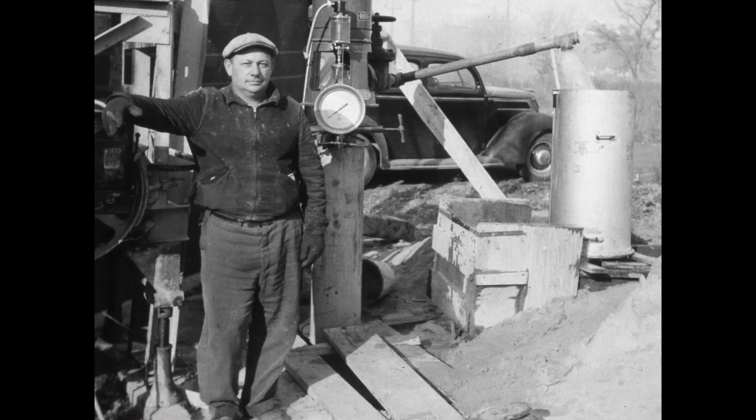Just a couple more pictures from our files. This is a pump test using an orifice bucket. We have a number of these. We still have one that we use today, and we have drillers borrow them once in a while from us.

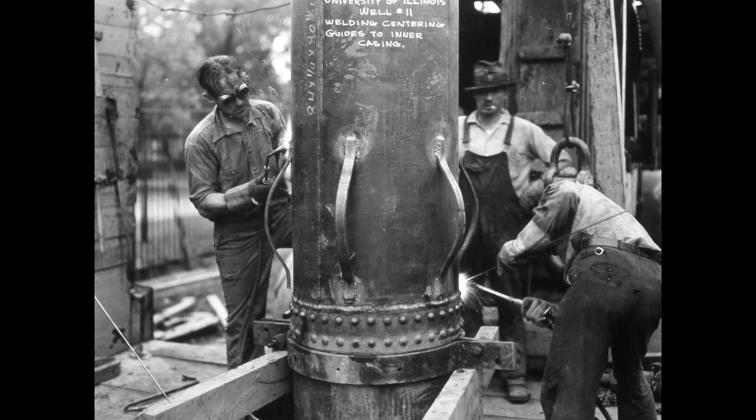And also just think about, if you're familiar with well drilling, this is a well that was put in on the U of I campus in 1926, I believe. And if you look at the work that went into not just the spacers, but riveting every 10-foot section of that pipe, it was quite a job. And so, today's modern drilling methods and the way we've come along has really changed the world, so to speak. But a lot went into it back in the day.

So a little bit about the water survey. I'm in the groundwater science section. We not only house the state's well logs, but we do data collection through that. We also have a water quality lab, but we do research and public service. And this is just a pump test at the city of Chillicothe that we were involved in, using an orifice tube there to pump that well and conduct an aquifer test.

But we also monitor stream flow. We have recorders. This is an old Stevens recorder. Most of our monitoring wells around the state now, our observation well network, we're using telemetry and pressure transducers, just because one, we get the data in real time, and it's allowed us to put our hydrographs online and show that information near real time. And we're working on trying to even improve those

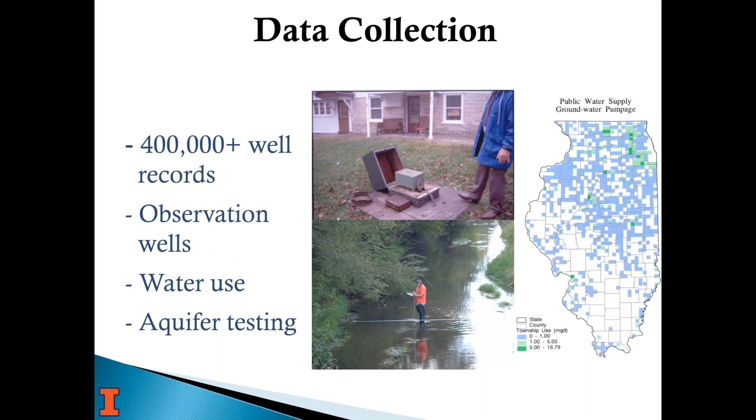capabilities. But also, if you're an Illinois operator, you're familiar with the Illinois Water Inventory Program. Our state Water Use Act requires every community water supply to send their water use in to us once a year. And so we have that data going back to 1978, which is really helpful whenever you're trying to plan and look at the growth of cities and things like that.

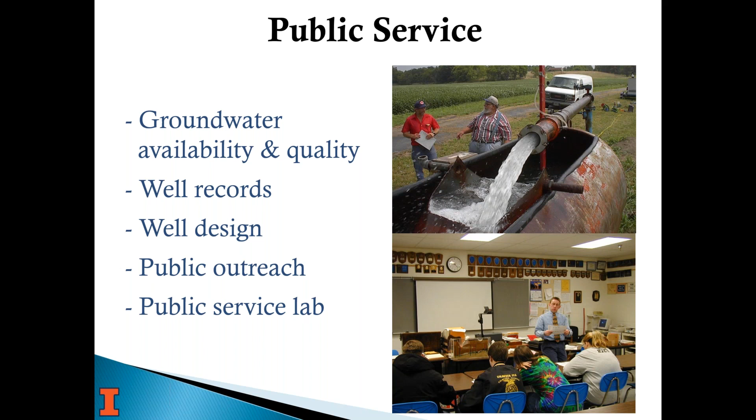As far as public service, again, we do pump tests, not as many as we used to, but we also house the well records, and we have well design capabilities, as well as a lot of public outreach and education programs. We run a program called the Private Well Class. It's nationwide. It's meant to help people with private wells understand how to take care of them and what risks they have and those sorts of things. Plus, our public service lab does water quality analysis, mostly for private well owners, but we have others as well, for inorganics and metals.

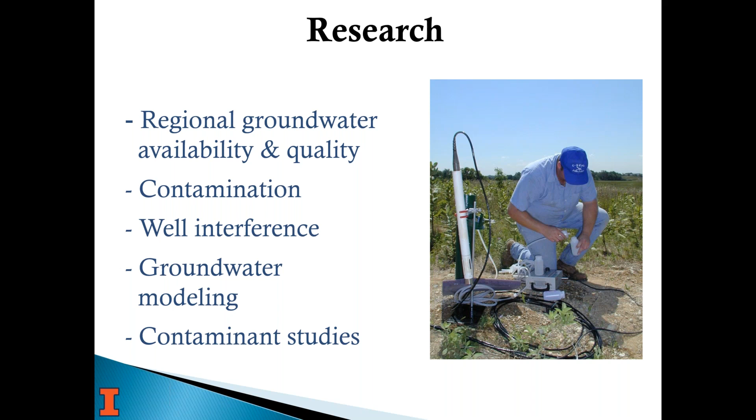And then on the research side, we do a lot of work looking at regional groundwater quality and availability, contamination problems, well interference. We've really led the way in groundwater modeling. We've developed some methods that are unique. We're working now with some of the cities in the Chicago region because of the problems with the deep bedrock aquifers there, as well as looking at things like PFOA and PFOS and lead and other kinds of contaminant studies, arsenic as well.

So we're going to go through a little geology lesson. What I've learned and what I assume for most water operators is you may have a well and a groundwater system, but it's just your source of water. You're not a geologist by trade, and there's just a lot of things that we all can learn from each other related to those things. So this is a porous system. When you look at a block of either rock or sand and gravel, it's either the fractures in the rock that hold the water or the space between the sand grains in the sand and gravel aquifer that hold the water.

So how porous that unit is, again, whether it's bedrock or whether it's sand and gravel, is called porosity, and it's one of the core measures of how good an aquifer might be. So in this case, it looks like sand grains, the water travels between them. That's why sand and gravel aquifers are so productive, because the grains are large, so there's a lot of water available, as much as 30% in a completely saturated aquifer in sand and gravel. And so it's why your well is able to produce so much if that's what you're in.

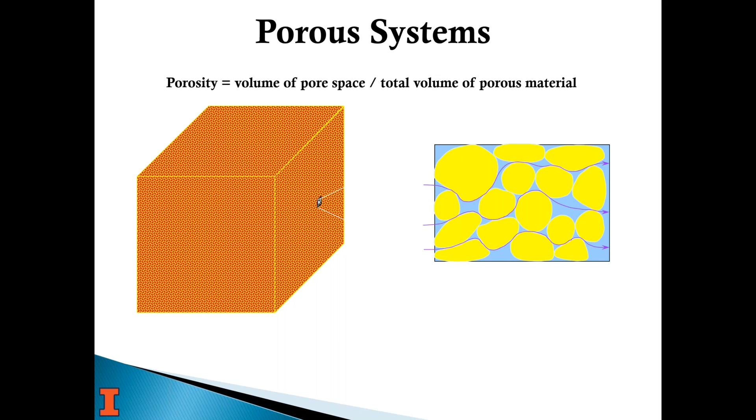And as far as bedrock, it's usually fractured flow. Sandstone, if you're in a sandstone aquifer, can have some secondary porosity in the rock itself, but for anything else, limestone, dolomite, even granite, those sorts of things, it's just the fractures that provide the water. So when you drill a well into a fractured system or into a bedrock system, it really depends on what fractures you hit. If you hit a bunch of fractures, you may have a lot of water available. If you miss all the fractures, you may have hardly any.

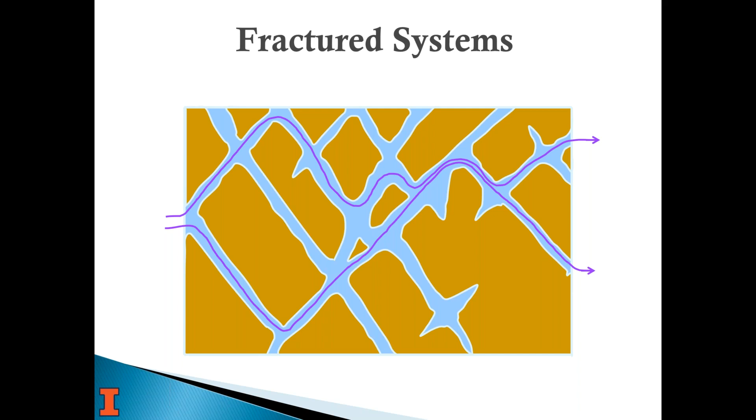And we see that in certain places in Illinois, especially one irrigated area. You can drill a well, and if you hit one of the large fractures, you're pumping 12 to 1,500 gallons a minute for your irrigation system. If you miss, you may have a 400-foot, 12-inch bedrock well that only produces 30 to 40 gallons a minute at most. And so they're really different systems when you look at sand and gravel versus bedrock and what you need to understand. So just another look at that.

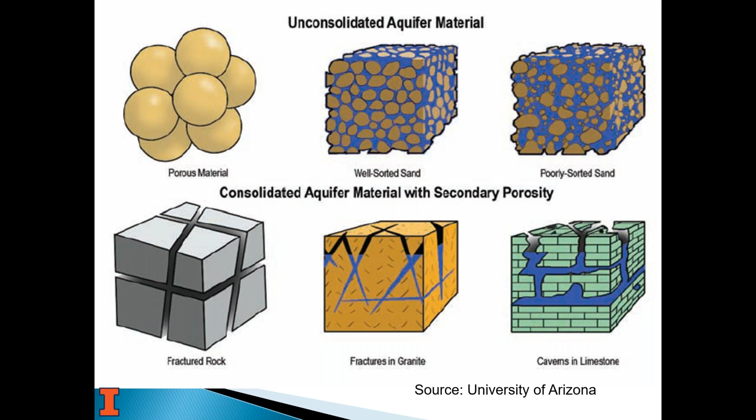And if you get in things like granite, like in the Rockies, the porosity there may be less than 1%, just because granite's very hard rock, the fractures are small, they're usually near the top, and if you don't hit very many of those, they're not that extensive and you're not going to have much water. And so it's just, again, good to know. It makes a difference, and I'll explain a little more about where your water's coming from, how close to the well you're actually getting your water from, and some of those things.

The other term that's really important and related to how much water a well can pump is the permeability of the aquifer that the well is finished in. When you're in a gravel versus a silt or a clay on the left here, it's highly permeable, sand and gravel, larger grains, and allows as much as 3,000 feet of movement a day. And permeability is a measure of the velocity, but the way water moves through the ground is also based on the difference in water level.

So when you're not pumping your well, it's at a static water level that's equal to the static level in the aquifer. But as soon as you turn your pump on, you're drawing down the water level in the well. That creates a cone of depression because water wants to be flat. So think about it like if I pour water on the end of a table and I lift up that end, water runs downhill. That's what it does whenever you turn on your pump as well. It runs towards your well because the pressure is lower there, and it's trying to fill that in to make the pressure equal again.

Almost like if you think about your bathtub, the water surface is at the same elevation. But whenever you turn on the drain, it starts lowering on the end where the drain is, and all the water flows to it because it's trying to be level. So permeability is just how fast it can get there. In a bathtub, there's no resistance because there's no grains in there. But if you put a bunch of clay or sand in there, you'd see a difference in how fast the water drains out.

Because when you get down to really small particles like silts and clays, even though they may have the same porosity, like the clay shown here may have a porosity of near 20 or 30%, the grains are so small that water can barely move through it. So on the low end, in a really tight clay, water will only move a foot every 10,000 years, which is why clays and silts, as well as on the right there, shale and rock that are cemented, are considered aquitards or aquicludes, meaning water doesn't go through them, instead of aquifers where water can be moving through that system. So on the right side, we have limestone and sandstone.

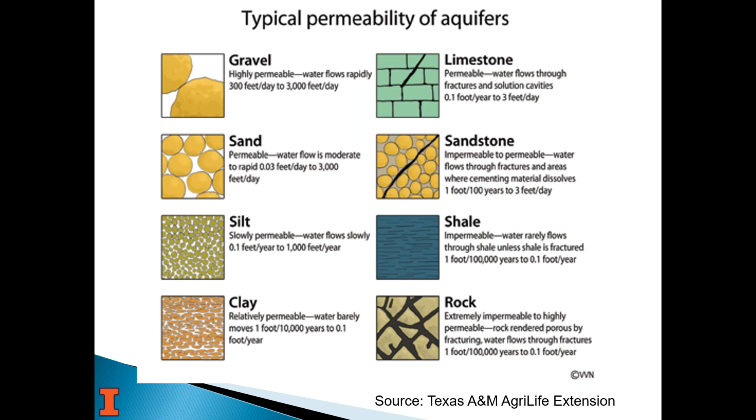Shale is basically cemented clay. It's really tight, bedrock formed clay. And so that's why it's 1 foot in 100,000 years on the low end, because if it's a really tight clay, water barely will move through it. So it acts as a barrier for water flow.

Okay, and these are just other examples of the way water moves through. These are like horse troughs full of that material, and you poured water uniformly across the top. This is kind of the wetting front, or how it moves through. And so you can see the sand and gravel, it kind of moves through all the grains in the sand and gravel. So it's kind of got an even front. A little bit of variability in the sand causes a little bit of differences.

But then on the lower left, crystalline bedrock, as I mentioned, the porosity can be less than 1%. The fractures aren't necessarily connected. And so you're really hoping that you're hitting a bunch of fractures whenever you drill into that, if that's what you have. And that's unfortunate. A lot of times in areas like that, that's why they have lakes or surface water systems, because there just isn't enough water available. There may not be any aquifer with potable water.

So then dolomite, it's formed in layers. And again, these are also simplifications. Rock does not lay flat in the ground. It's usually at some angle. And then every once in a while, there's some kind of geologic fracture or break where the units have separated, when the mountains were formed, or when there's been earthquakes. And so it's much more disjointed than this, but it's really meant to just show, like the one on the bottom, how water would move through.

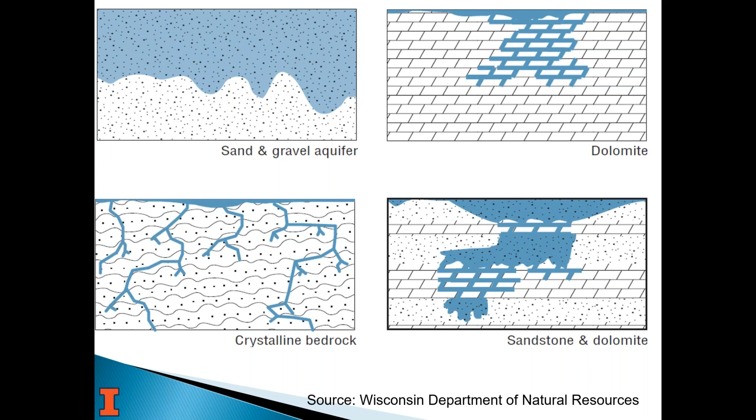And so it's not uniform, it's not even. All aquifers aren't created equal, and that's why you need to understand what you have in your area and where your water supply is. This is from the Iowa Department of Natural Resources and their manual, it's just a groundwater basics manual. This is what we see in Iowa, Illinois, glaciated areas.

There's glacial drift on top, and that may or may not have layers of sand. In this example, really, they're very small layers of sand where the glaciers have receded or advanced and then melted, except along the river valleys.

And, for instance, the Mississippi is now, say, half a mile wide in parts of Illinois. But the actual bottom ground where the Mississippi used to flow when the glaciers were melting might be 5 or 6 miles wide. And most of that bottom ground is full of sand. So you see a lot of communities, like here that shows 2 wells. One's in the sand and gravel at the top up there, and the middle one is down into the sandstone and limestone in the bedrock aquifer, because they're off that.

The other option a community has is putting a well in the sand and gravel and alluvial bottom, like along a large river system, and then piping it back to their community. And we certainly have a lot of that in Illinois as well, in areas where once you get off the bottom ground and get up in the uplands, there may be, like in this example, glacial drift that is all clay, so there's no aquifer that well penetrates. And so they went down into bedrock.

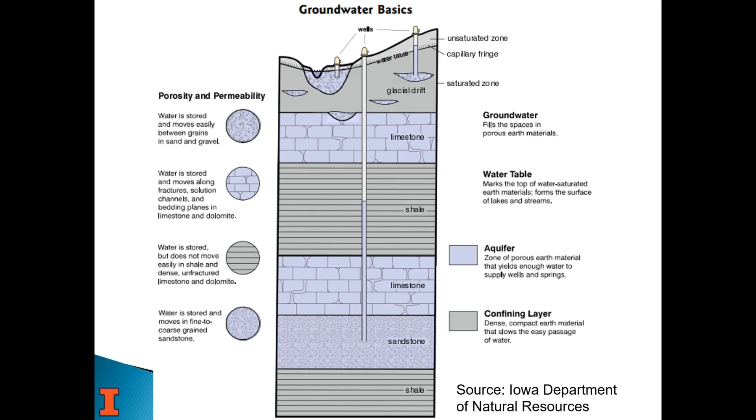As far as groundwater flow, the hydrologic cycle, most of what we see is about rainfall running off into streams and then eventually the ocean and evaporating back up and starting over. Well, there's a whole groundwater component that's much more complicated that also plays a part in that. The recharge area is shown on the upper left and right where water infiltrates into the ground, and then it can move in a shallow system, it might move within days to a seep, like it shows on this diagram, or a spring, or it can move straight down through the aquitard over time and eventually get to bedrock.

But all along here in all of this system above the aquitard, that's above the lower aquifer, it's a shallow system that eventually runs back to that stream. And that's because the water level in the stream is lower than in any of the aquifers. And you can see the water table shown in the dotted line on that. But all that water is flowing, eventually discharging to the stream. And so it becomes surface water again, and starts the whole process over again.

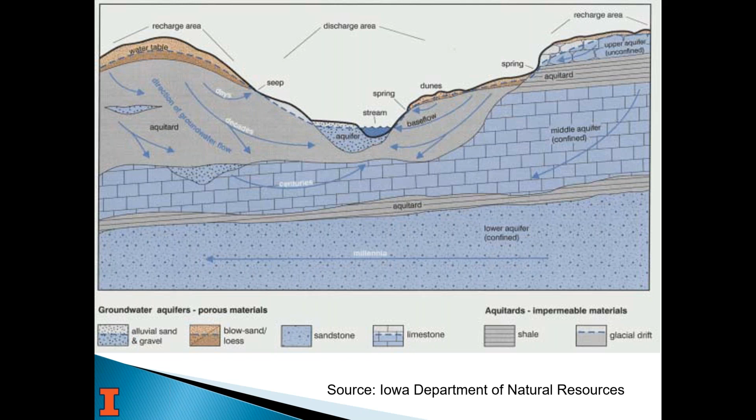But what's interesting here is an aquifer that's truly confined and deep enough may have a recharge area that's hundreds of miles away. And so even though there's a stream above it here in this example, the lower aquifer is flowing from right to left. And its discharge point, as I said, could be 100 miles away. And there is a very little bit of water moving through that aquitard and pushing down into that aquifer, but it's not a lot. Most of the recharge is probably coming from somewhere off to the right in that system, because the aquitard just doesn't allow that to occur.

And so there's really three types of geology that determine what kind of well you have. And I included dug and bored wells here mainly for non-community systems, because sometimes a campground or a small business may be in an area where there's no real aquifer. And so they may have a large diameter dug well, especially if it's very old, or bored, if it's more modern, but it's a large diameter well meant to store water. And so I included it here. Most community water supplies aren't going to have a dug or bored well. It just doesn't provide enough water in real time to supply a community and daily use.

The other types, though, are either sand and gravel aquifer wells or consolidated rock wells. And the reason we classify them that way, I know there's a lot of ways to put a well in. You can punch them in, there's a lot of other things you can do in types of drilling, but they're in one of these types of formations, and that really dictates what kind of supply you're going to have and what considerations you need to make.

So in some cases, like we showed in our examples, there may be choices. You may have 2 or 3 aquifers that you could decide to use. In a lot of cases around a community, there's a shallower sand or a shallower aquifer that a lot of private wells are on in that area, but it doesn't supply enough water for a large community. So the community well may be much deeper in a separate aquifer where they can pump more than a few hundred gallons a minute without having to worry about not having enough water.

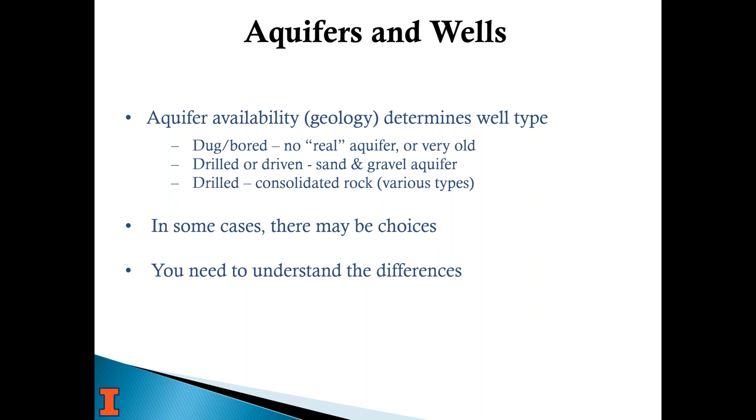So as far as dug wells, we see all kinds of them, all from the old dug well that's on the upper left here that has many problems. The reason it looks muddy on the lower right is because that's a cattle pasture, and those posts are all rubbed raw from cattle rubbing and grazing. This well's only 25 feet deep or so, and it's getting water from the water table.

That's a field. This year it looks like it's in set-aside ground, but it may not always be. And again, this is a pasture. Cows are defecating there and everything else. And so this is a really poor choice for a drinking water supply. And again, we wouldn't expect to see this for any regulated public water supply, non-community or community.

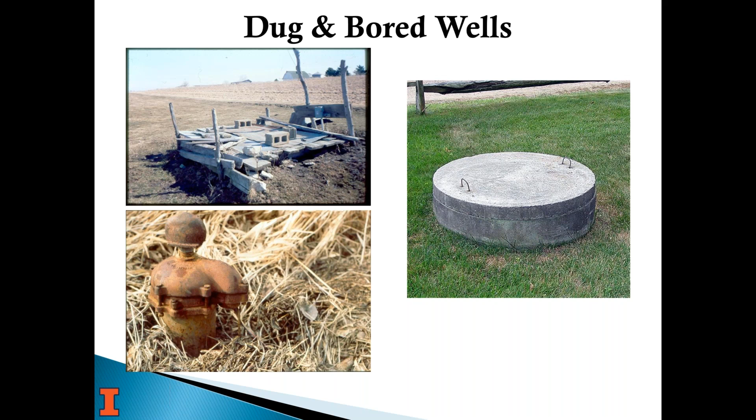The other 2 are also bored wells, one using concrete tile to the surface, and the lower left one with concrete tile that stops at 10 feet. But then they've covered the upper 10 feet with clay and concrete to make it less susceptible to surface contamination. And here's what those 2 look like.

The one on the left has a concrete tile going over the surface. If it's done properly, it's got concrete or clay in the annulus around that 36-inch pipe or concrete tile down to at least 10 feet, and that's the law in many states. But then below that, you're taking advantage of the annulus, you're putting gravel pack in there so that you've got more storage. And that's really why you have a large diameter well, is because you need the storage.

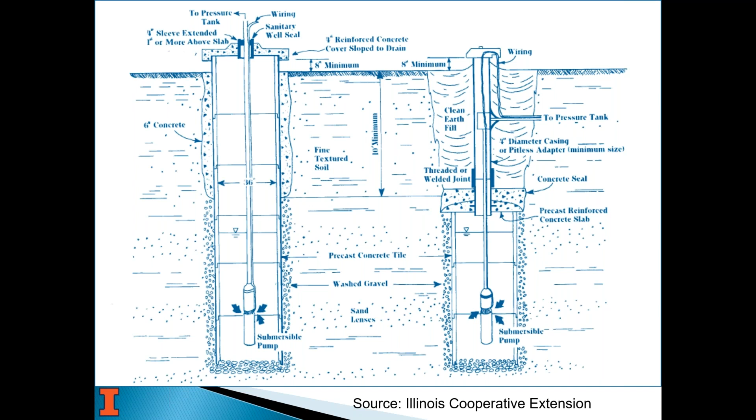Water seeps in slowly. There's not necessarily any sand. This shows a thin sand lens, but it may not be that extensive. And then the diagram on the right is the same type of well, except they put a concrete pad down below 10 feet so that they can fill that upper 10 feet with material that's going to help prevent surface infiltration.

Okay, so sand and gravel wells, if you're in a sand and gravel aquifer, your well has a screen. And what I want to point out here is if you have a 200-foot well that's in sand and gravel, you likely have, as a community water supply, maybe 10 to 20 feet of screen. And if your aquifer is not as good, it may be screened through the whole unit. But if you have a thick aquifer, I'm thinking about in Illinois the Mahomet, there's places where it's nearly 200 feet thick and it's fully saturated. You probably have a 10 to 20 foot screen for your well.

A 12-inch well, this may be pumping 200 or 300 gallons a minute, is a typical type of system. And the deal there is, if you have a 200-foot well, you only have water entering your well in that lower 20 feet where the screen is. The rest of that casing is either PVC or steel, and it's solid. And so no water can come in your well except at the screen.

And the way screens are sized is based on the sand and gravel that you have. The driller will take samples as he's drilling through the unit and then size the screen accordingly, along with a gravel pack around it that'll prevent sand from pumping through. Sometimes some fines will pump through. But again, and Dick's going to talk about this later about developing wells, probably a critical piece there to make sure that you've got everything in place and you've sized it right and all those things.

This is just an example of a well in Illinois showing the log. If you don't have your log or haven't looked at the log for your well, you should get it from your state. Hopefully they have it. It's not always available. We were doing a study 20 years ago or so, working with a number of rural communities in one county, and they had had a fire a long time ago, and their records were all lost, and so they had no records on the depth of their well or any of the information about how it was constructed.

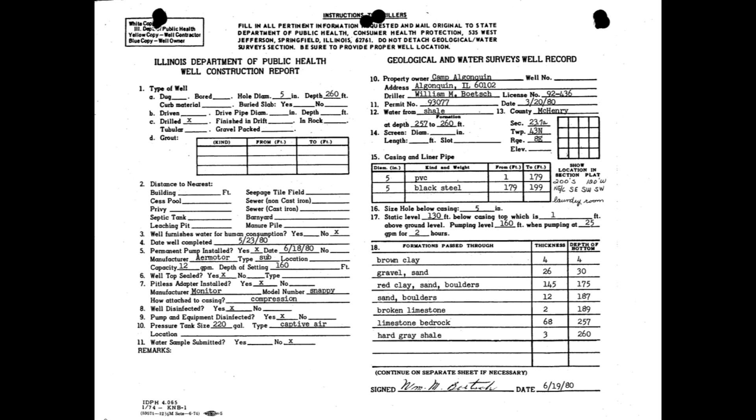Okay, so other things you should know, and I'm using Illinois as an example. I've worked in Illinois aquifers for 30 years. Your state will have maps of where your major sand and gravel aquifers are, where your bedrock aquifers are, water quality, a lot of different tools if you know who the right folks to ask are. Your primacy agency that you have to deal with for compliance should be able to tell you who those folks are. It may even be them. And so it's very different in every state. Your USGS, State Geological Survey, DNR, DEQ, there's a lot of different names they go by depending on what their roles are and how the state set up their drinking water programs.

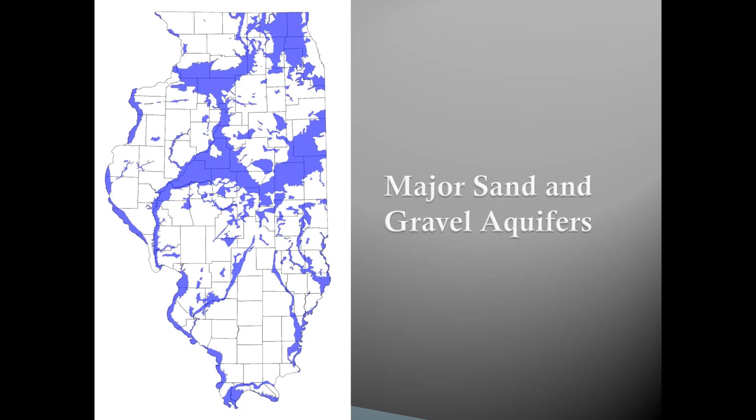But a lot of information is available through, like for us, through the water survey, we typically do regional assessments of aquifers. So this is in northwestern Illinois, where the ancient Mississippi used to run. Before Illinois was glaciated, the Mississippi actually turned and came through the center of the state. It didn't flow where it does now with the border with Iowa. But then glaciers came and turned the flow of the Mississippi to where it is today.

But those ancestral valleys are all full of sand, a lot of sand in some cases. And that's what the Mahomet is, I mentioned earlier. It's a bedrock valley where a river used to flow, the Mahomet-Teays. And in places it's 15 miles wide and 200 feet thick of sand alone.

And so that information is useful just to understand where water might be available. Maybe you don't realize your bedrock water has issues and you're treating and it's going to get more expensive. There may be one of these valleys close to you. Just talk to your resources folks is the message.

Because then when you look at this, it's the same map, but this is the thickness, elevation of the top of the aquifer that fills up that valley. It's all buried. But it shows you where there's a lot of water available. The glaciers do funny things. Some of them are thicker than others. Sometimes a second glacier will come along and scrape off a lot of that material. It's just much more complicated than most folks realize.

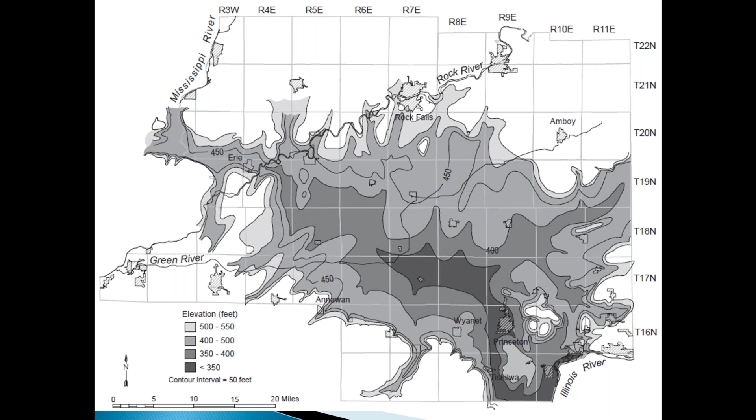And that's why if you reach out to some of these groups like your State Geological Survey, they can explain all that to you and provide you with a lot better idea of what you're looking at for water supply and where it comes from, where it's recharged, all that sort of stuff.

And then in cross section, this is what that looks like. So the deep aquifer here, the ancient Mississippi, is the Sankoty Aquifer, and that's on the bottom above the bedrock. Then there's this glacial till with a big hill, which is actually a moraine where a glacier stopped and deposited all of its material that ground up. And that's why you have this large elevation jump, and it's mostly clay with some thin sands in the middle of it.

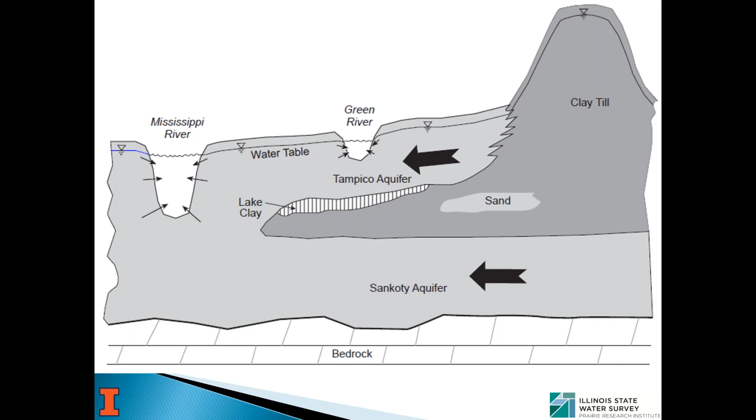But then the Tampico Aquifer shown here is actually part of the Mississippi after it moved to its new location where it is today. That's all the bottomland for the Mississippi, and the Green River is there now, but a lot of that is sand. And that's why if you're close to a large river system, a lot of times you'll have alluvial sands, which are deposited by a river, available to you. It can be much more complicated.

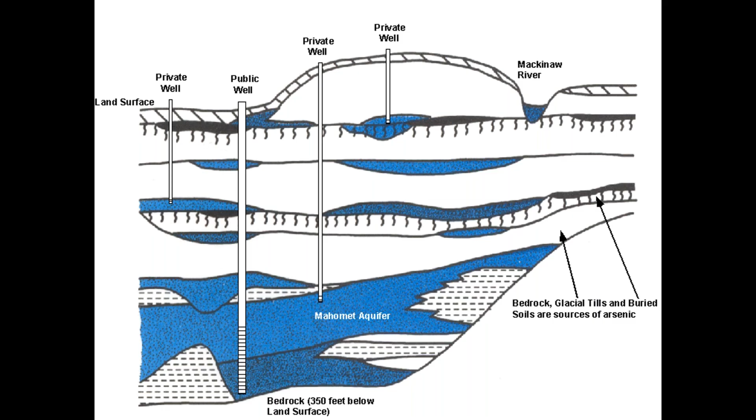So same thing for bedrock. In Illinois, we have a shallow bedrock system that doesn't exist everywhere.

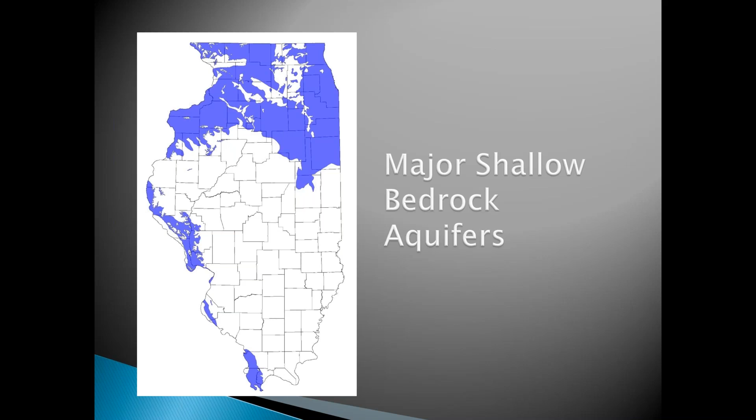But this is a dolomite mostly, I think. Yeah, it is. That communities can use for water supply. And then we also have a very deep bedrock system.

And I want to point out here, the blue is where we consider it an aquifer, but that deep bedrock aquifer actually exists everywhere. So that nice smooth line in the middle is because further in southern Illinois, our deep bedrock is saline. It's saltwater, and it's from an ancient sea that was here, and so it's not potable.

That line is actually moving because in the Chicago area especially, they're pumping the deep aquifer for water supply, and it's moving very slowly, but we're seeing the TDS increasing as you move forward. And recently, a community that's very near this line decided to put in a deep well to help supplement their lake water.

And honestly, it was a crapshoot whether it was going to be too high or not, if they're going to be able to treat it, because over time, depending on what happens with pumpage further north, by lowering the water levels further north, it's making water migrate to the north. And over a long period of time, if that continues, a lot of this aquifer will be unusable or will require basically treating it like it's seawater.

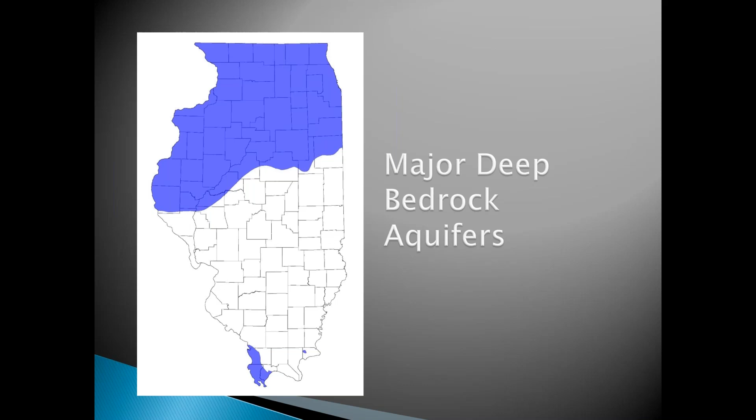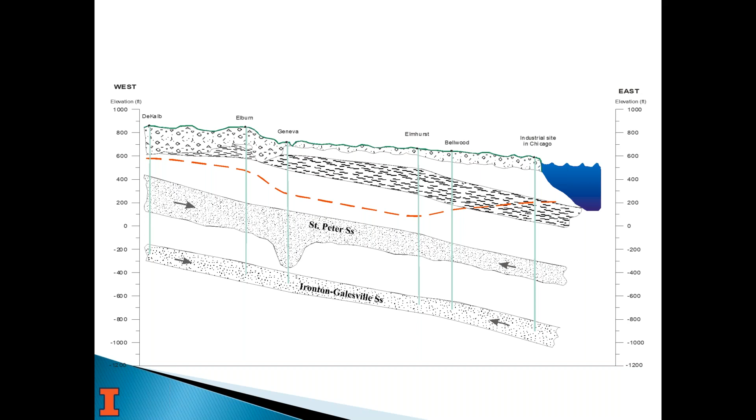If I took a juice box and I put a straw in it and I squeeze it, what happens? Water comes out, or your juice comes out. And it's the same thing here. It's the pressure on the system that forces water levels up in a well.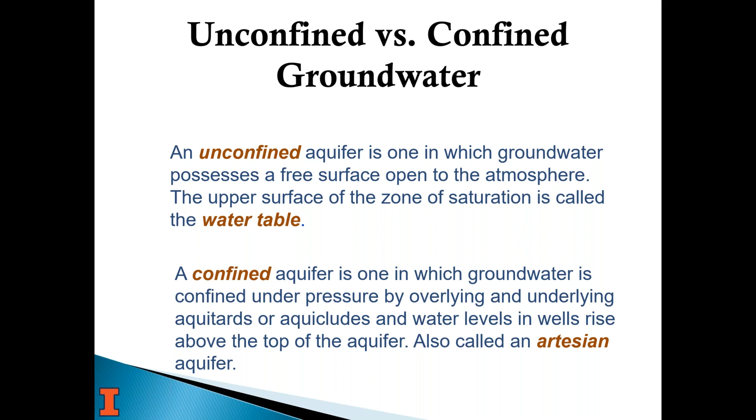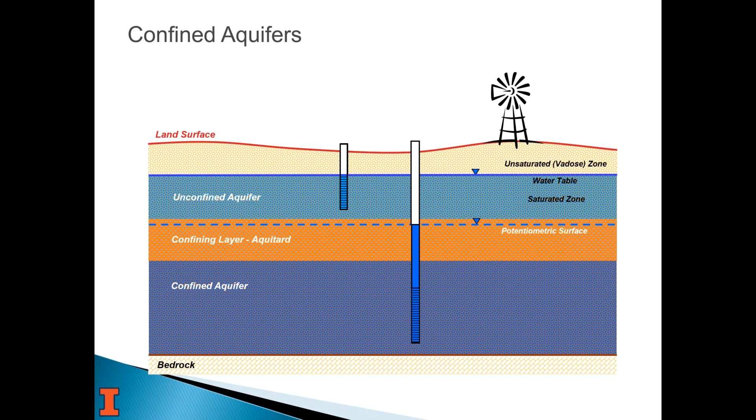A confined aquifer is called an artesian aquifer, which I already described, I think. So in an unconfined aquifer, the water level is at the water table. If you have an aquitard in between, you can have two different water levels because the aquitard prevents flow. And so the head in the deeper aquifer here is dependent on the pressure from both sides. This is an idealized example. What you've got here is your water table at a higher level than your confined aquifer, so water is moving down through the aquitard slowly to help recharge it because it's at a lower head. So there is water movement here; they're not at the same level.

Okay, so in a confined aquifer, you can see the water table is the blue dashed line here, but the water level in the confined aquifer is below that. So as I mentioned, that means that water is flowing down through the aquitard into the deeper aquifer. And then you can have that the other way. You know, if there's pressure from either side pushing water into the deeper aquifer at a higher pressure elevation, piezometric head, you can have a higher water level in the aquifer below the water table.

And in this case, what that would mean is water is slowly going through the aquitard on the top of the deep aquifer. It's moving upward into the water table and recharging the water table. And if it's flowing, you have a flowing artesian well. But in either case, whether it's flowing or not, it's still considered artesian.

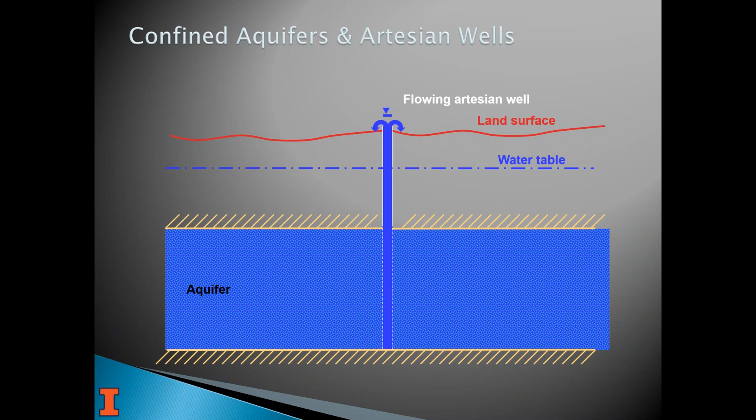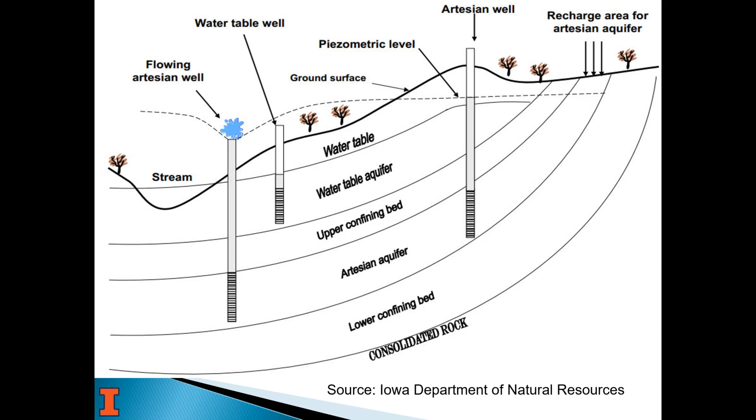And so just to show that again, on this example, to go back through it, you can see what an artesian well is. It means the water level's under pressure. So there's water from, in this case, on the right, increasing the pressure on the artesian aquifer, causing the water levels in the wells to go up.

As far as pumping, and again, this is idealized. So if all of this was uniform sand, what you'd see when you pump your well is drawdown most at the well, and then water's flowing from all around trying to fill it in. So when you look at the upper part of this diagram, that's a cross section. That's what it would look like if you could see through it from the side. And the diagram on the bottom is what the equal elevation lines look like.

So you've got a cone of depression that's at 400 feet at the well, and that's elevation, mean sea level. And out where the edge is, where it's not influencing anymore, it's at 460. And so these circles correspond, if you could draw a line straight up to where it's at on that cone of depression on the diagram that's from the side, the cross section. And so that's what happens. So it's radial flow, it's coming in from everywhere because it's equal pressure, and it's trying to fill that back in. And in this case, there's 60 feet of drawdown.

If this were a more permeable aquifer and it was infinite extent to the left and right, this drawdown might only be 20 or 30 feet instead of 60. And so the bottom of that would be at 430 instead of 400. And it's a factor of how good the aquifer is and how quickly water can move through it and how much water is available in the surrounding area.

Okay, oh, did the wrong thing here.

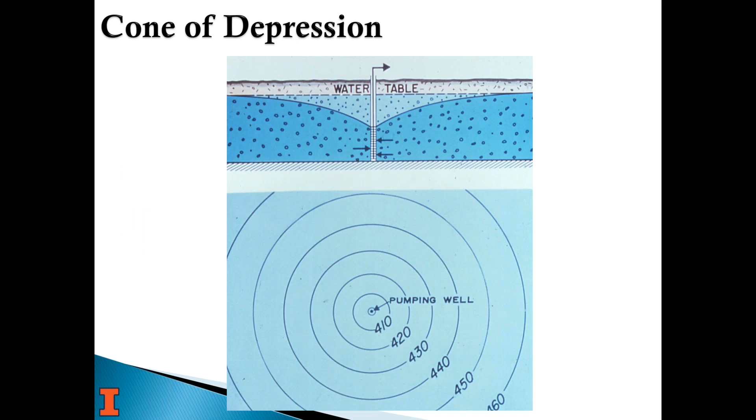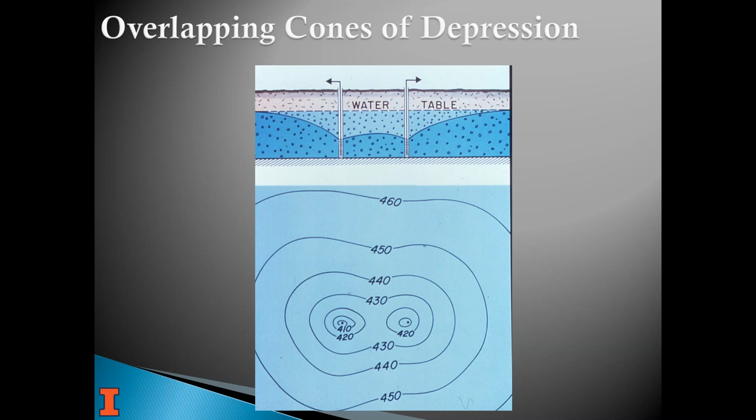There we go. When you have two wells, it looks a little different. And if you're a larger system and you have multiple wells on at the same time, this is what that would look like. You know, water's trying to flow in from all around it, but in between the wells, it's competing for the same water. And actually this probably should have shown a little more drawdown than the 400. It's an idealized example, because it's going to create a larger cone of depression because you're actually pumping more water out.

And then if you're on the edge of an aquifer where there's a boundary, so, you know, I showed those river valleys and like the ancient bedrock valleys. Well, those only exist for a certain stretch of width. And if you get close to one of the edges, then there's no water once you get past the aquifer, so it's going to create more drawdown and take more away from in between your well and the edge, and it's going to create larger drawdowns than it will on the other side.

So in this example, in our cross section at the top, on the edge of the aquifer side, you know, most of it's pretty low, and it's going to draw down a lot more, and it's going to end up using more water from the other side to fill in because it's got more water available.

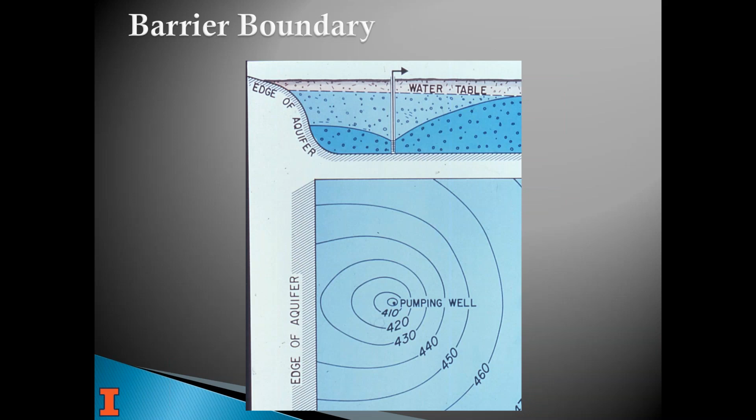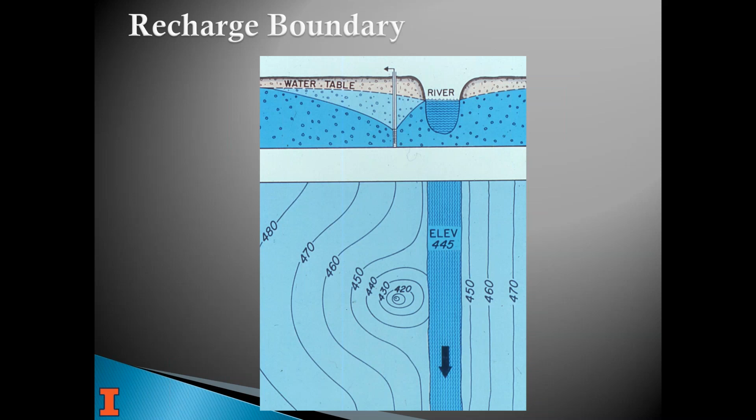So Mason County in Illinois is a great example of that. We've mapped those water levels and you can just see how the Illinois River, the Mackinaw River, and the Sangamon River influence water levels in that entire county.

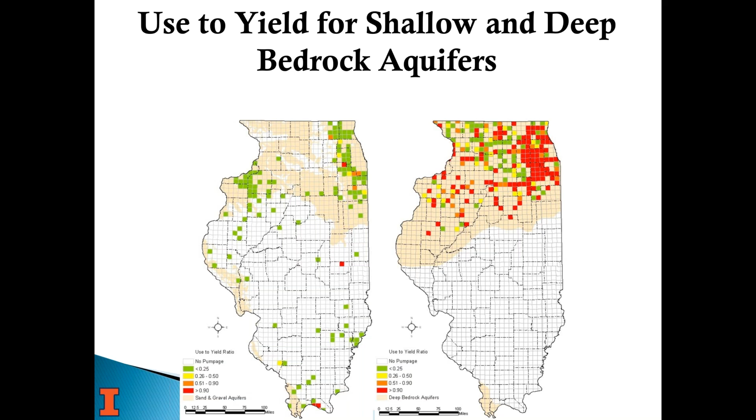And so these things are really useful to understand where the problems are in the state, where if we're dealing with a particular community, we might consider looking for additional water supply. And so having this kind of information is a great resource for you, especially as you plan for additional use, like if your community is growing, or you have a big industrial user that might want to come into the area. So I mentioned road salt.

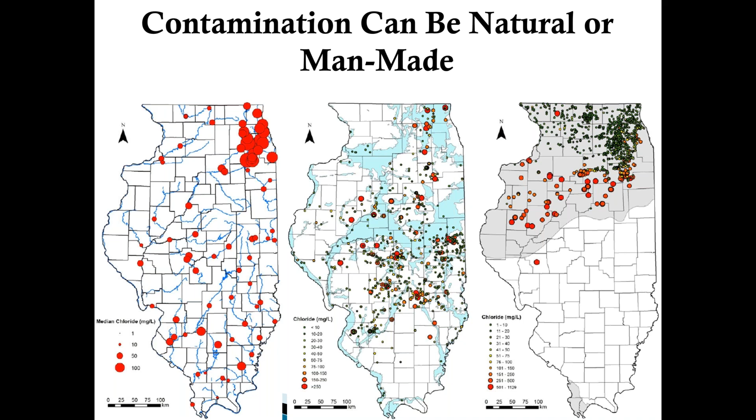But then on the far left here are surface water samples. And it's pretty obvious what's happened here. So this is actual surface water chloride values. You don't expect to see chloride values of 100 milligrams per liter in a river. Yet that's what we're seeing now in the metro region, all because of all the salt that's used in the winters. And so it's a real problem, and it's changing the ecology of some of the lakes, as well as something you might need to deal with if you're pulling from one of these rivers for your water supply.

But the whole point of showing all this is that no matter what state you're in, your state resource agencies probably have some of this data, or your USGS may have done some of this type of work. And so it's worth exploring and understanding what the situation is for you, in addition to any compliance sampling you've done. So that's what I wanted to talk about today related to geology and wells.

I do want to talk a little bit about wateroperator.org if you're not familiar, and just give you some examples. This website is funded through RCAP, the Rural Community Assistance Partnership, through EPA. So it's EPA money, and it allows us to offer for free a lot of resources to water and wastewater operators. And so we have a calendar that we put about 15,000 events a year in. That's every training event for water and wastewater operators in every state. And it's meant to be a resource.

And so there's also 15 to 16,000 resources that we've vetted. So there's no fluff, there's no advertisements, there's nobody trying to sell you anything. It's just information from groups like WEF, AWWA, state sections, TA providers like Rural Water and RCAP, EFCs, USDA, EPA. And it's all free. So anything in here is freely available online, and we actually just link to it and try to make it easy to find. So I'm just going to show you quickly how to do that.

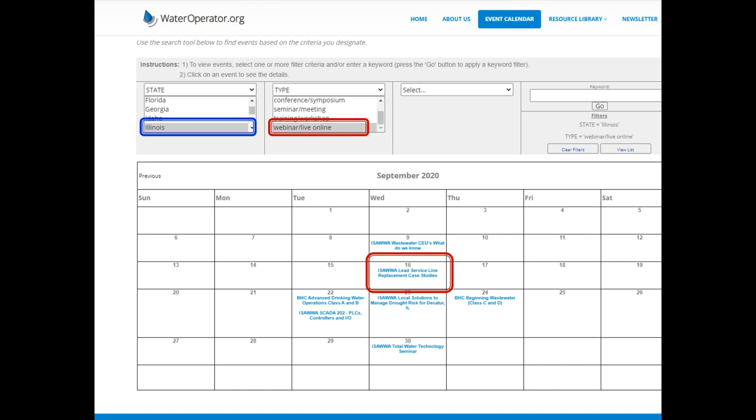So if I want to narrow that down, and I know I'm not going to go to an in-person training, which in Illinois some of these folks have started doing again, you can say type webinar or online, and it's just showing you the webinars that are available or live online. And so if I select one of those, Illinois Section Lead Service Line Replacement Case Study, it pops up a window that shows me all the details.

It's free if you're a member. It's $30 if you're not a member. It's worth 1 credit. There's the contact. You can click on that link for event info, and it'll take you to their page with all the details where you can sign up. And we put this information in a database for every single event you find on our calendar. So you can find out who it is. It takes you back to their site.

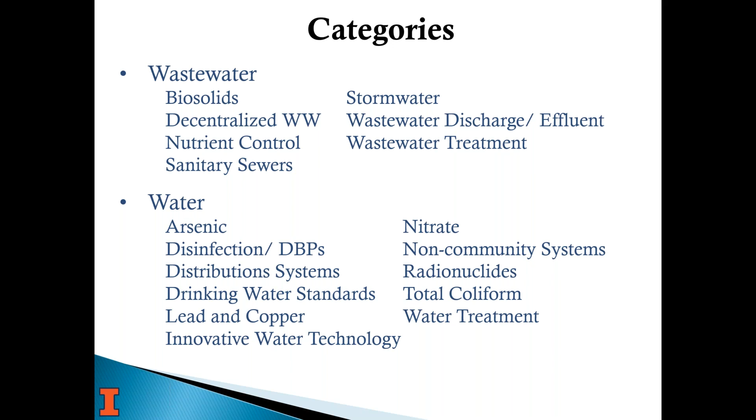These are the topics we have that are really related to either water or wastewater, and these are the ones that, it doesn't matter whether you're a wastewater or water operator, certification information, consumer information, financial management, all that sort of stuff is really useful to you. And so you can select any one of these categories when you're going through this filter. So you click on the select button and then click on category, and I selected arsenic. So it shows that there are 187 records related to arsenic, and there's 19 pages of 10 here.

So you can quickly scroll through this and read what you might be interested in downloading rather than downloading, especially some EPA manual that's 400 pages, and you have to look through it for 20 minutes before you decide what you want. We've gone through and done that for you. And again, these are all vetted sources, which means they're only groups that are either state agencies or actual TA providers or associations, or federal agencies, but we list all of their stuff in one place.

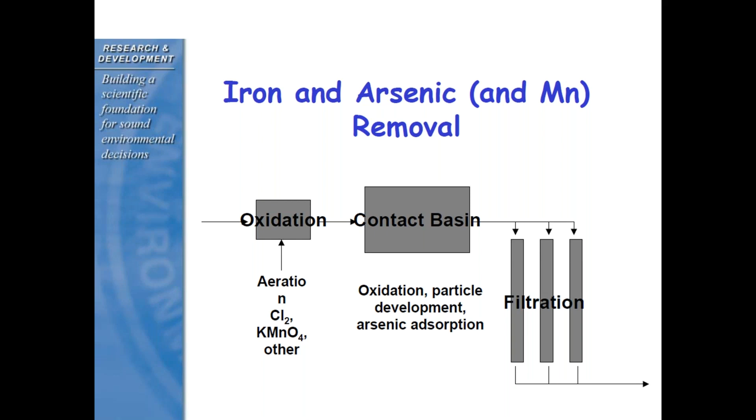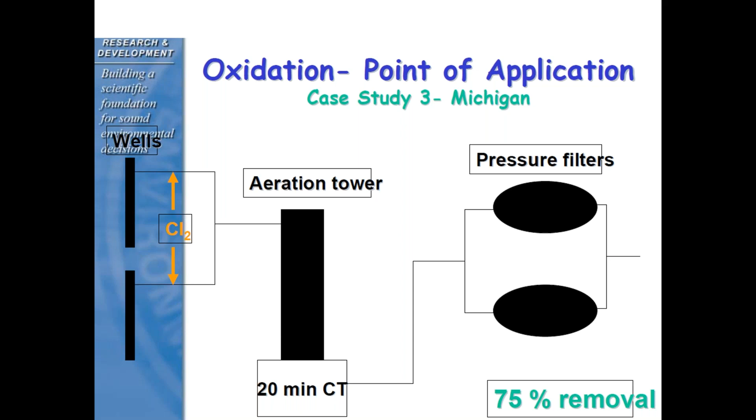So when you look at their plant, they decided to test what happens when they add chlorine. When they add it at the end, they get 50% arsenic removal. When they add it in front of the pressure filters, they're still getting 50% arsenic removal. But when they added the same chlorine at the same rate ahead of their treatment plant, after the wells, now they're getting 75% arsenic removal by doing nothing different except putting it in the system in a different place. And so that may save you a ton of effort, or even having to add treatment to your system that might be really expensive. And it's an example of just the type of material that's available.

And so I won't go through any more of those for brevity, but you can search for anything. And I'm always willing, if you give me a call, to hop on my computer while you're on your computer, and we can walk through trying to find stuff. I do that for a lot of operators, and I'd be glad to. So you can always consider that if you get lost on the site, or you can't find something you're looking for. It may be that we don't have it, but what we'll do for you in that case is we'll try to find it, or talk to someone who may have it and see about getting you the right materials.

We also have a class that's for CEUs.

I think we're up to maybe 24 states that accept our online class for CEUs. When you click on that, it takes you to this groundwater and well care for public water systems. It's a 6-lesson class that's based honestly on our private well program, where we have a 10-lesson class for private well owners. But in this case, we went to the effort.

If you've ever dealt with trying to get a class approved for credit, you know what a burden that can be depending on the state. That's why after 3 years of having this class available, we only have 24 states that accept it. Some of those states are changing now because of COVID, but there are a number of states that just do not accept online training. And I understand their logic for that.

So you need to check, there's a list. There's a button you can click on the course overview that tells you whether you can get credit in your state and what the rules are, because they're different in every state. Some states require us to keep records for 5 years. Some states require us to send in something every month on who's taking it from their state, all that sort of stuff. So it really depends.

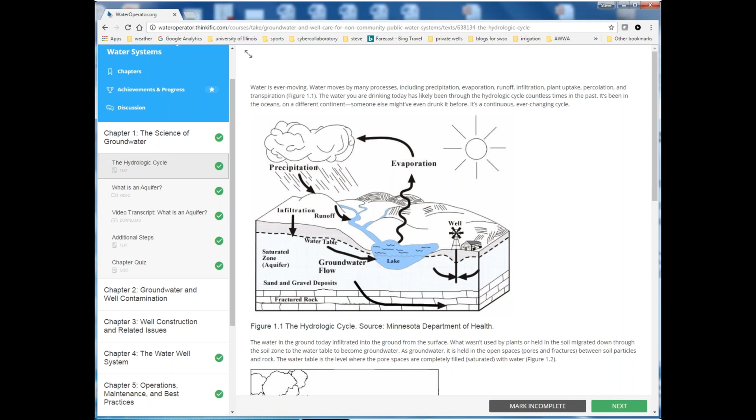So this is just what it looks like. It walks you through the hydrologic cycle, some of the things we covered today, but there's a lot more detail. And you have to pass a quiz at the end of each chapter. That's part of making it worthwhile and making sure you actually go through the videos and everything else. Once you've gone through the class and taken the quizzes, I took it and I got 100%. What a surprise. Then you can get a certificate and turn it into the primacy agency, or in some cases we have to turn it in for you, depending on the state.

It's the only class we have. Our job isn't to compete with all the TA providers out there that do training. We don't want to do that. We want to actually help you find those TA providers and the classes they provide. That's what they do for a living.

This one class actually started out, and this is an old slide because it still says non-community public water systems, when we were asked to provide a class for non-community water supplies. After we built it, we found that a lot of community water supplies were also interested, and a lot of states wanted us to make it approvable for both. So now it's just groundwater and well care for public water systems, I believe is the way it's titled. And that's the only class we offer.

I want to tell you about our newsletter. It comes out every 2 weeks. There's no fluff in it. It's steadily grown since we started it. We started with about 100 people in 2009 or 10, and it's up well over 2,000 people. A lot of those are operators, but also TA providers and agencies. We try to provide the best information that'll help you with today's issues, common sense things.

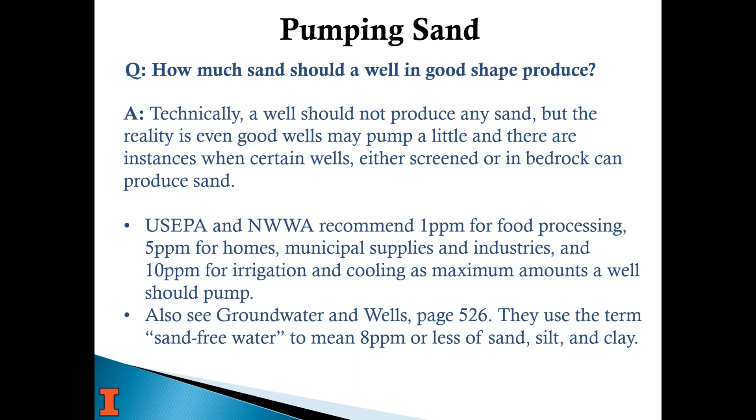Yeah, one of the things we've seen with the drastic decline in water levels is you are reducing the water pressure on the formation, and wells that were not sand pumpers in the past have now become sand pumpers due to the reduction in pressure. So that's something that we're always worried about too, especially now in the Joliet area where the Ironton-Galesville water levels are declining quite rapidly. Oh, sure.

That makes sense. Okay, wire to water efficiency. I'm glad you explained this, and this is on 2 slides, because I had no idea what this was. What's the acceptable range of wire to water efficiency for a well? What's the highest efficiency we should expect after well rehab?

Well, wire to water efficiency is an actual electrical measurement. So you're looking at the efficiency of your pump and the efficiency of your motor. You combine those two efficiencies with your production to get a wire to water efficiency. Obviously, you want to maximize that.

There is no magic number, but sometimes in bid specifications, they will want you to meet a certain number. And sometimes if you don't meet that number, you'll get penalized. And if you do better and get a higher wire to water efficiency, you can be rewarded.

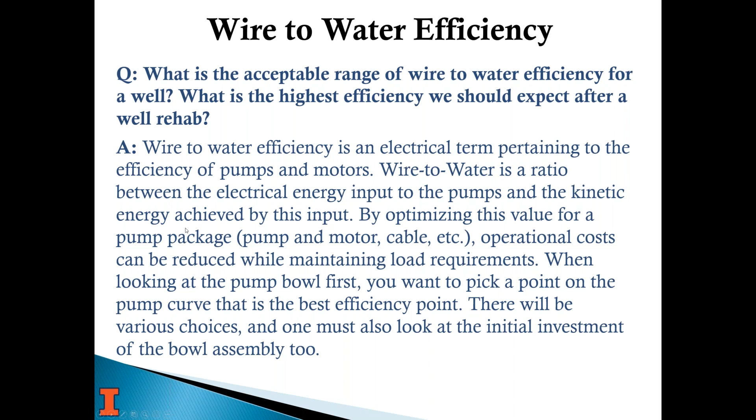As far as efficiency in wells, typically I think what they might be thinking of is a sand and gravel well, where you're looking at what you talked about in the beginning of permeability of formations. You can look at the production of a sand and gravel well, but in order to arrive at an efficiency of that well, you need to have a piezometer located so many feet from your production well so that you can measure water levels in your piezometer well plus your production well and go through a very strenuous...

Uh-oh. Dick, we lost you. Now we got you. Are you there? Yeah. Okay. Strenuous was the last word we heard.

In order to get efficiency of a well, it's typically in a sand and gravel well where you measure the water level in a piezometer well located maybe 50 or 100 feet from your production well, and through a strenuous calculation of the water level in your piezometer and the water level in your production well with gallons per minute, you can come up with a well efficiency.

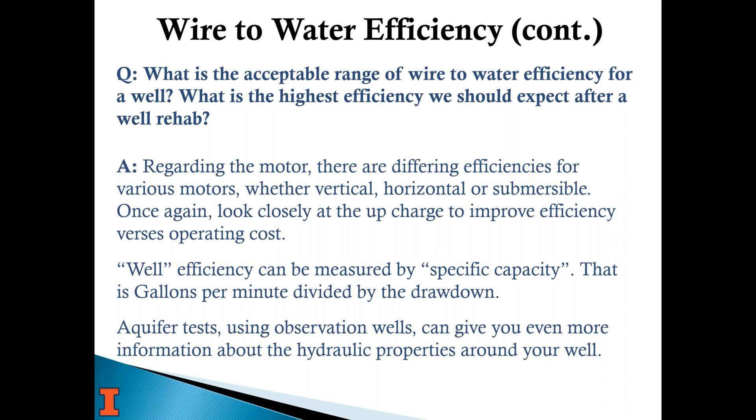So I'm not sure what the question was addressing, whether it was a well efficiency or an electrical efficiency, but I think I addressed both. If someone wants a little bit more detail, feel free to contact me. Yeah. You should have included that. Thank you.

What does it mean to sleeve a casing when it's corroded? Sometimes we run into older wells where the steel has become corroded. Sometimes holes develop. You can sometimes pump sand or material through those holes, or undesirable water quality from a higher level. You can do one of two things.

We'll address a corrugated sleeve, I think, in the next couple of questions, but I think what they're getting at here is, say you have a 12-inch diameter well that has corroded casing, you can put in an 8-inch diameter inside of the 12, past the area of compromise, and then fill that annular space with concrete, neat cement, in order to seal off the corroded part of the casing.

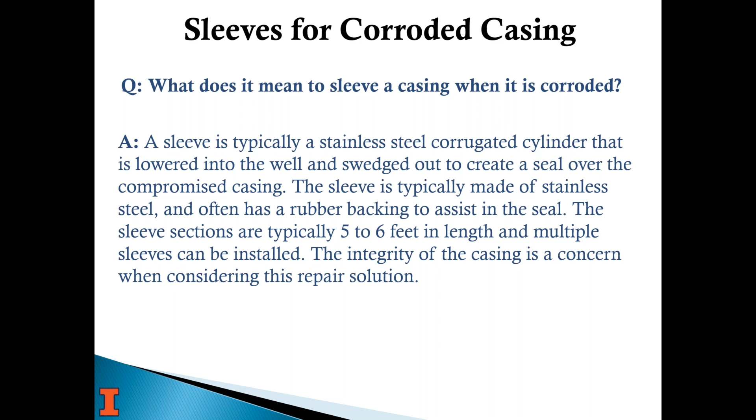Yeah, I think part of that is also another question we got, and I included both of them. And so the other one was about recasing a well, I think, and it might be the next question. Yeah, I probably put the cart before the horse. Oh, no, it's all good. Yeah, but it's the same. In this case, though, what you're talking about is an entire casing all the way down, not just a section to help with the corroded part.

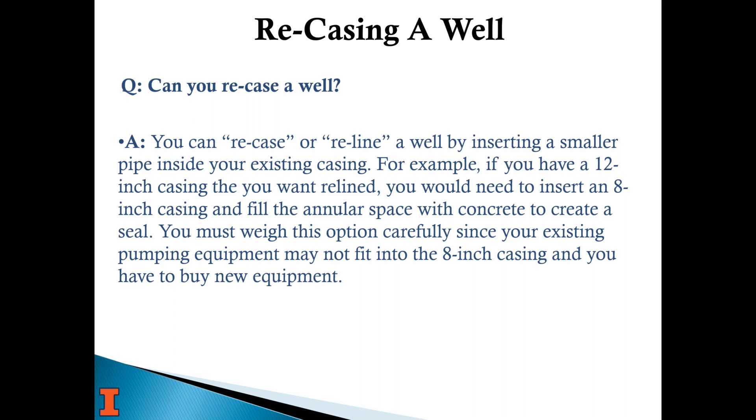Correct. Right. So, yeah, and you made a good point here at the end. When you do that, it may mean that your existing pump or anything you have down your well needs to fit in that 8-inch pipe instead of 12-inch. So, okay.

If a water system is transitioning from groundwater only source to adding surface water treatment, what are the main considerations for safe delivery of drinking water? And that kind of changed your answer here a little bit. Good. Well, I'm glad you did. Well, what you had said is that's a legal issue, and it really is. If you're going to mix those waters, I'm sure your state primacy is involved anyway, because if you're going to change your treatment, you have to get approval, at least in most states you would. So really, you need to talk to your primacy agency about making sure you run your system in a safe way.

But what we've seen is examples in the past where a community had groundwater and they wanted to supplement an aquifer and add surface water into the groundwater, or they've got actually two systems and they're blending. And if they're not careful and they haven't looked at the chemistry, you can have unintended consequences is the bottom line, and so you need to make sure that those two chemistries will work together. And I know there's cases in the past around the country where it's caused contamination of the water because the chemistry was different and the way it reacted.

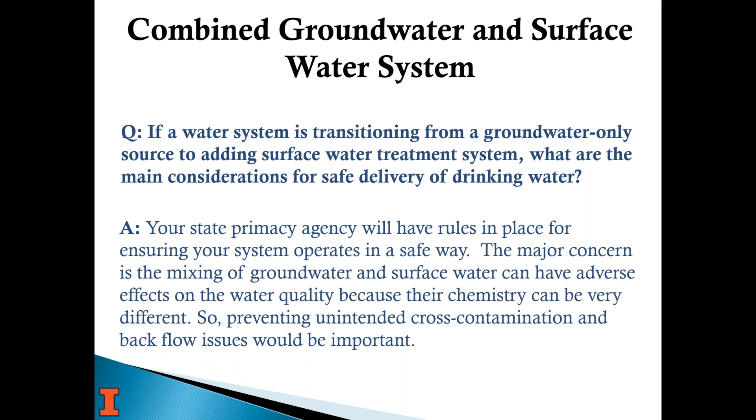Okay, so what aspects of well care is the state regulating or responsible for? Go ahead, Dick. Well, a good question. Obviously, you've got to...

Yeah, we lost you. Yeah, I'm losing my connection every once in a while.

I apologize. But that not only includes your well and your pump, maintaining that in a good working condition, but your distribution system, your pump house, your pressure tank, distribution system, etc. Some of your sanitary requirements might be a good place to start. Yeah, so a sanitary survey is a requirement for public water supplies every 3 years.

And what I noticed, Wyoming doesn't have primacy. So the US EPA, Region 8, I think, is the primacy agency for Wyoming. And what we found on their website, many moons ago, was an actual blank sanitary survey, the one they used there. And I know it had a lot of questions about the well and that side of the system.

And so if you're a groundwater supply, I'm guessing if there's anything wrong or concerning with your groundwater system, including all the things Dick just mentioned, your pump house, pressure tank, all that stuff, as well as through your treatment plant, they probably listed those there, and it's probably worth taking a look at what that has to say. So, okay.

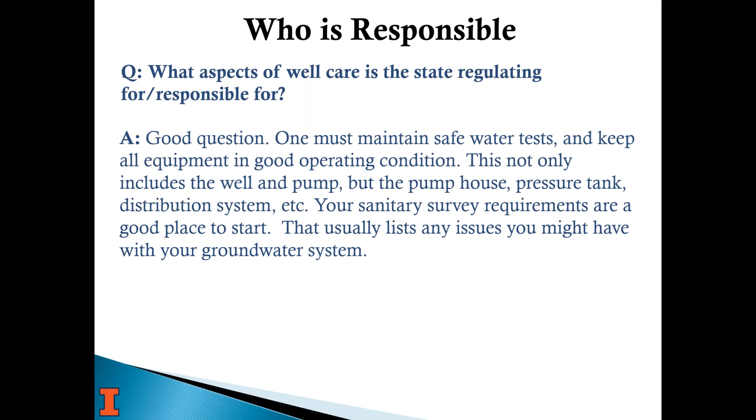So what's different about a well cap that is flood proof versus a regular well cap? I learned something new today. Well, a regular well cap or a discharge head of a pump is going to have a vent, because when you pump your well and your water level drops, you've got to allow air to enter the well, and when the pump stops and your water level recovers, it's got to go back, so it's got to be vented.

A true flood proof cap would not have a vent on it, because you want it to be watertight, airtight in case of any flooding. What we typically do where wells are located on or near a river susceptible to flooding is we actually raise the casing of the well up higher. As an example, LaSalle area where the wells are located right on the river, the wells are extended up somewhere between 20 and 30 feet above the level to accommodate that.

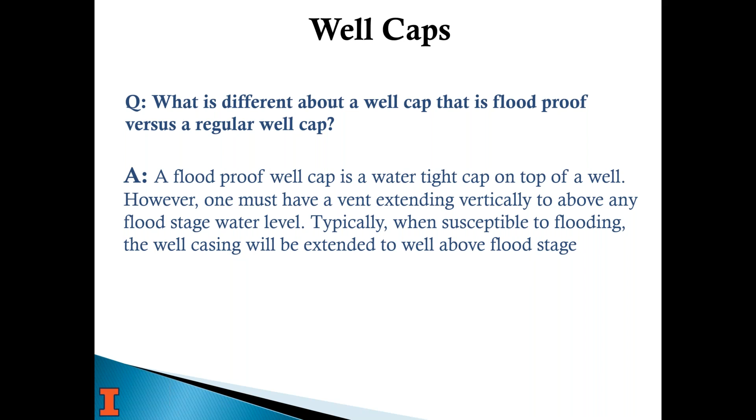Yeah, it's really interesting to see a well house up on top of a casing with a ladder that goes up 20 or so feet. And you mentioned that you have to at least extend the vent above that. And I don't know that I've ever seen that. It's always that the entire well is up that high. So right, that's typically what you run into. Yeah. Okay, so hang on, because we need to see if there are any other questions.

And so I'm going to pull up... I'm going to make this a little larger so everybody can read them. Hang on. Nope, that's too big. I can't read that myself.

Okay, so first question. Recently we had a special sample taken from a well house and found nitrates in our system. Do you recommend drilling a new well and at a new depth? Wow. Dick, what's your take on that? You want me to go first? Yeah, you go first. I'm thinking how to not get complicated in my response. So go ahead.

Well, so a nitrate sample likely means that the aquifer does have nitrate in it, obviously. There are several options. One would be to treat it instead of trying to drill a new well. When you get to the point of asking, do you need a new well or at what depth, that's a site-specific question. And it really depends on what your situation is.

And nitrates, we do see, so some of the research we've done in areas where there's especially shallow aquifers, we do see a profile for nitrate. It's higher near the top, it's lower down deep. Sand's a natural filter. We have a couple aquifers in Illinois along like the Illinois River where it's 100 feet of sand. And if we took a sample every 10 feet of depth, if we could do that, we'd see nitrate at the very bottom of that aquifer lower than it would be at the top.